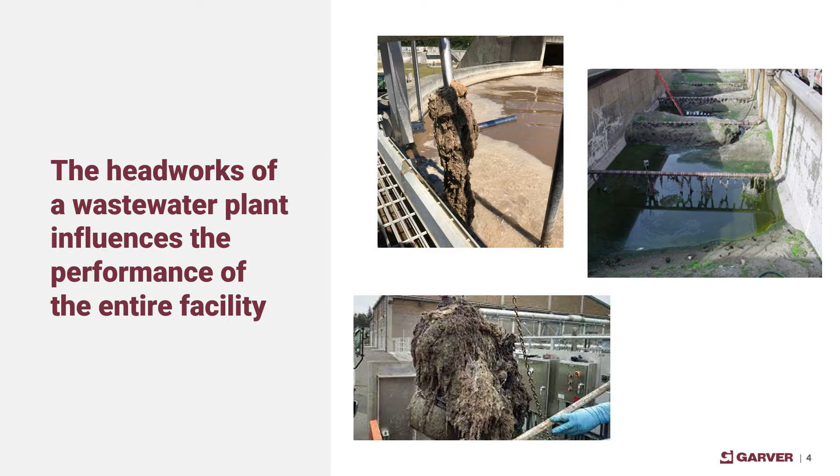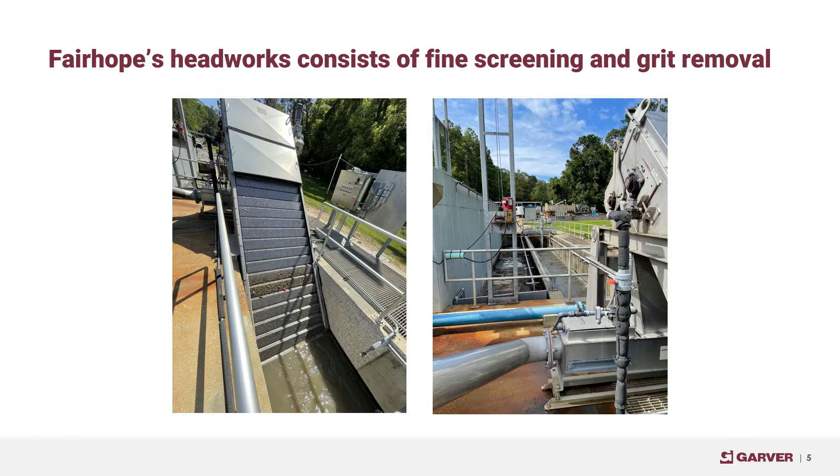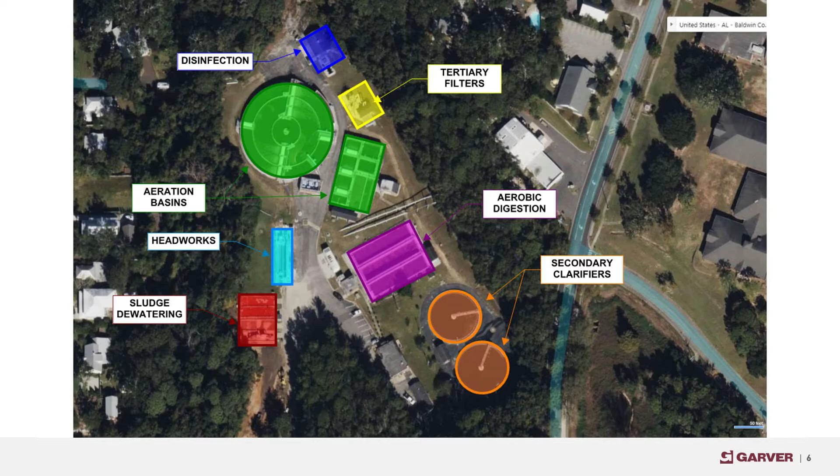So secondly is hydraulics. So what is our flow doing when it comes in the headworks? How are we approaching the screens? Are we getting the necessary velocity? Is it laid out properly? Third is redundancy. What are you going to do if you have a failure? What do you have? Do you have a backup plan?

Fourth is odor. So where are we located? Are we in a downtown corridor like Fairhope? Are we out in the country? There's different considerations that have to be made based on the facility. Fifth is technology. So are we matching the right technology of screening or grit removal with the plant that we're operating?

And then sixth is layout and growth. So are we working within the site plan appropriately to maximize efficiency, and are we taking into account the way in which this plant's going to grow? So those are kind of the six main drivers that we look at. And honestly, some plants may only have one or two things triggered, and other plants may have more. And stakeholders may care more about some of these than others.

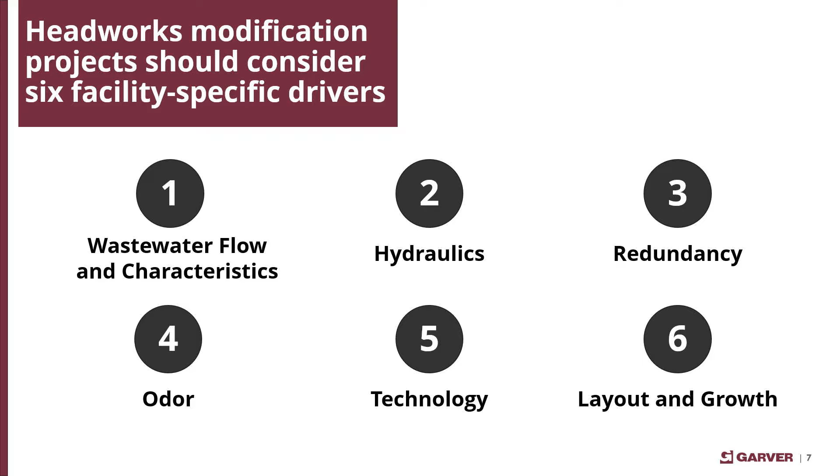We've got residents that live right by the plant here in Fairhope that probably care a lot about number four, about odor. And then we've got operations staff that see the other side of the hydraulics, the redundancy, and the technology. So their drivers are going to be ranked differently than council members or residents. So taking that into account, we've spent a lot of time with staff assembling these Fairhope-specific drivers. We've really tried to take into account all of the feedback we've gotten from not only staff but other engineers in the area.

So the first driver that we've identified is the lack of redundancy at the plant. There's only one mechanical fine screen at our wastewater plant now. And if that screen were to need a part replacement to be rebuilt, which is common, we would have to reroute all of the flow going through the fine screen into the manual bar screen. So that would involve staff having to rake that manual bar screen every two hours or so. So we're having to staff the plant most of the time around the clock.

And there was a specific instance conveyed to us by staff where there was a part during COVID that wasn't able to come in for almost six months, and they were down without the fine screen for six months. So they were having to operate like that, which isn't ideal. It can really take a cut into morale of these operators when they don't have the equipment that they count on working.

One of the main drivers, and maybe this one should have been first, is odor control. So y'all are in a downtown area next to a shopping area, next to residences. You're kind of down in a depression. So odor is going to kind of just permeate the area if not handled properly. So really it can impact people differently, but odor was definitely one that seemed like across the board everybody brought up: how do we address odor? How do we reduce odor in what we consider for the headworks?

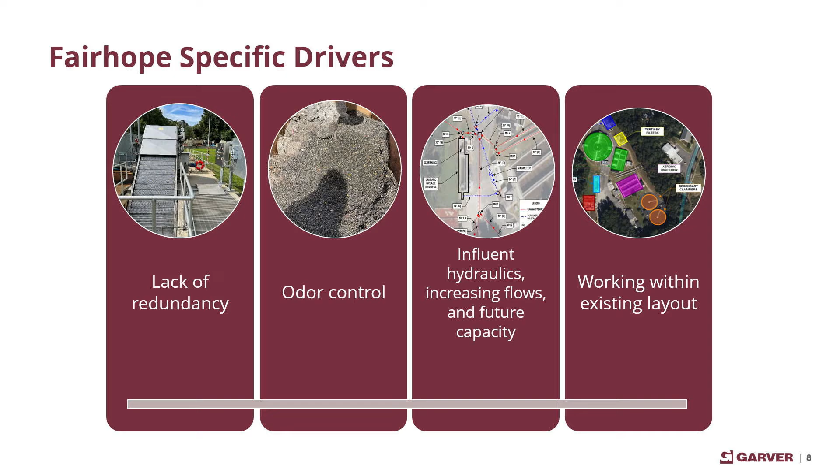One of the things that's unique about this plant is that we really have to be thoughtful about how we look at the layout, where we're putting things on the site, where we're considering putting things on the site. We just need to maximize the efficiency of where we're putting things so that over time we're not creating some sort of issue for them looking back saying, oh, we really shouldn't have put that there. So those are kind of what we've summarized as the Fairhope-specific drivers for this project.

So we looked in the report at various technologies and options to consider. But overall, our recommendation includes constructing a new headworks facility adjacent to the existing one, with 2 fine screening channels, a new grit removal system, a new screenings and grit processing building, and an advanced odor control system. So we'll show you some pictures of that. Wes is going to come and give an overview of that conceptual design recommendation.

All right, good afternoon. Thanks, Lindsay. I always feel like when we do these Headworks talks, there should be a disclaimer at the very beginning because it's not the brightest and shiniest, and usually when you come to visit the plant, this is generally what you try to avoid because it's the one with all the smells. And you know that we're going to have pictures in there that aren't the most attractive, so apologize for not having that disclaimer. But just to pull the highlights out of this conceptual evaluation and show you a little bit of ultimately what those recommendations are.

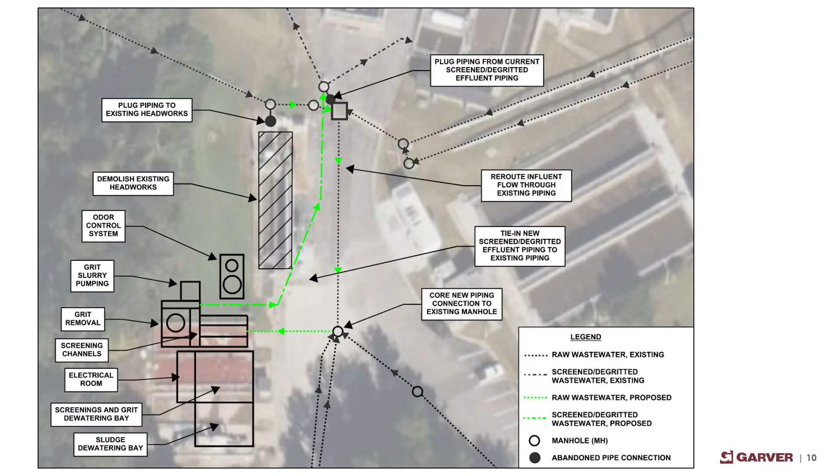So generally speaking, to the southwest of this figure is where all of the improvements would take place. And I don't want to belabor or try to walk through that because it is a busy image. This is just a rendering of those improvements, and we'll walk through that step by step to show you that facility at its conceptual effort. We're super high level in terms of project definition. As we go through detailed design, we'll be able to really dial down and understand what are the facility-specific requirements that make the most sense for Fairhope so that we're matching the needs of the facility with the ultimate things that this project would provide. But it does fit on the site. If we're looking at a high-level view, this would generally be the area that we're talking about.

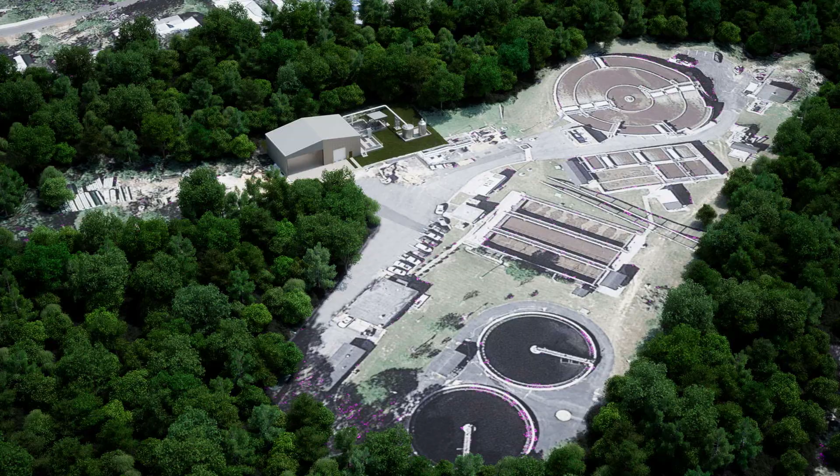Conceptual design recommendations, like Lindsay mentioned, are based on project drivers and facility-specific characteristics. So what this rendering is showing, the very first step that flow would go through is screening channels with fine screens. So Lindsay mentioned redundancy. This would provide staff with the ability to direct flows to another mechanical screen, which is providing more efficient screenings removal, which is ultimately protecting our downstream units. Now, we recognize that Fairhope made an investment with the existing headworks, and that equipment that you have in place could absolutely be relocated and put into these channels. That way it maximizes the investment that you've already made.

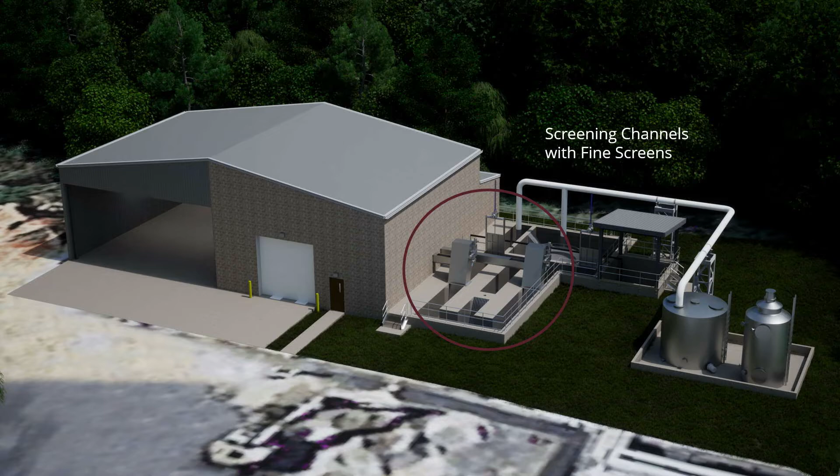The next step that flow goes through is what we call grit removal. What we're trying to remove is the coffee grounds, the eggshells, the small things that will wear and tear on equipment, but are still small enough that they'll pass through fine screening. This step is designed specifically to remove those. Now, one of the key differences with this step in the process compared to what you have now is it's much more confined. There's not a lot of turbulence, so that means we're able to capture that odor. We can put covers over that, and we don't have to worry about moving equipment needing to access that like you have now. So certainly much easier in terms of capturing that foul air.

Now, again, Headworks is not a luxury process. We're not producing that nice, fine, clean, treated water like we like to see off the back end of the plant. We are producing screenings and we're producing grit. And when we're trying to talk about odor, this is where a lot of that odor potential could come from.

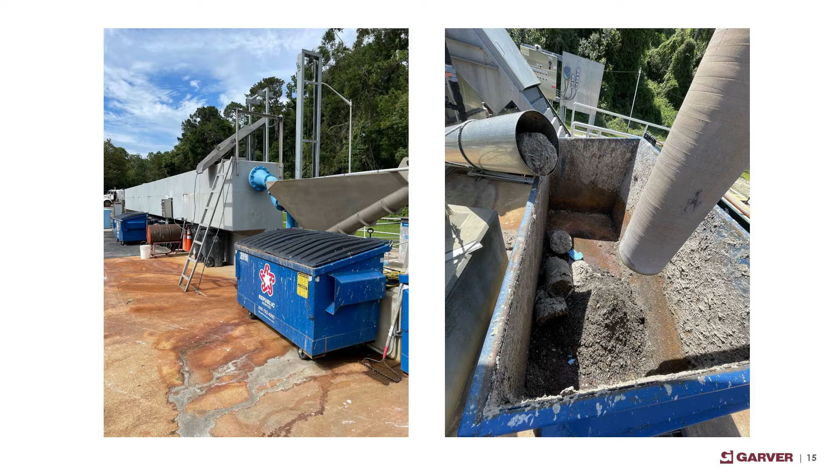So the equipment's one step of it, but we also have to deal with the dumpsters that are going to contain that because, again, they're putting off that foul air that we're concerned about. There's options in terms of how you deal with that. What this facility, in terms of these renderings, show, rather than try to provide bagging systems or other ways to capture that, let's just locate that inside a contained area so we can maximize that foul air containment and pull that out from a specific area so that we're trying to maximize that good neighbor approach

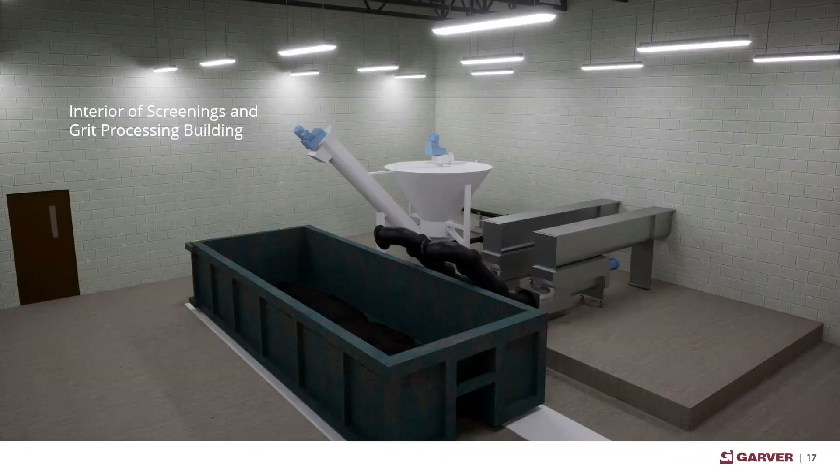that I know Fairhope values. Just a quick look inside that building would show that processing equipment is inside. That's where that dumpster would be located. So in theory, the only time that door would be opened is when the truck comes in to pull that dumpster out, take it to the dump, and bring it back. So again, capturing that air at the source inside.

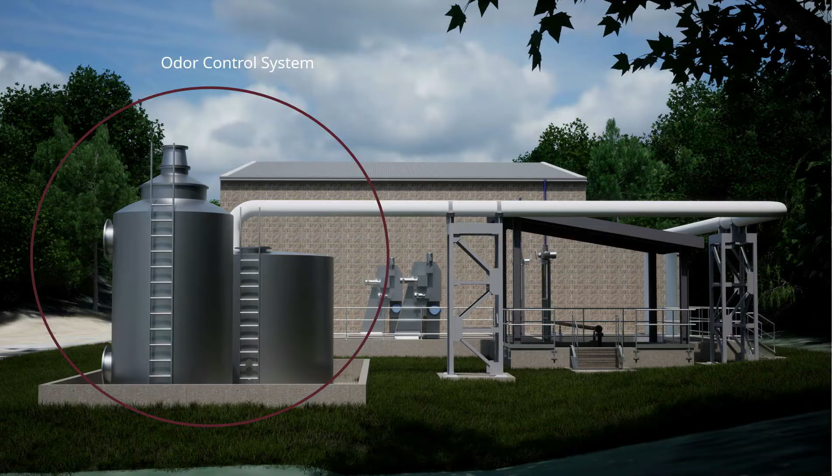The last thing is odor control, unfortunately, is not just covering the channels or putting things inside. That air is hazardous. That air contains constituents that can lead to corrosion. Hydrogen sulfide is a very hazardous workplace environment that we don't want our staff to be around, so we have to pull that air out and we have to pass it through an actual treatment system. This system, and again, this technology would be evaluated further. Generally for headworks, we're looking at biological treatment through a biotrickling filter.

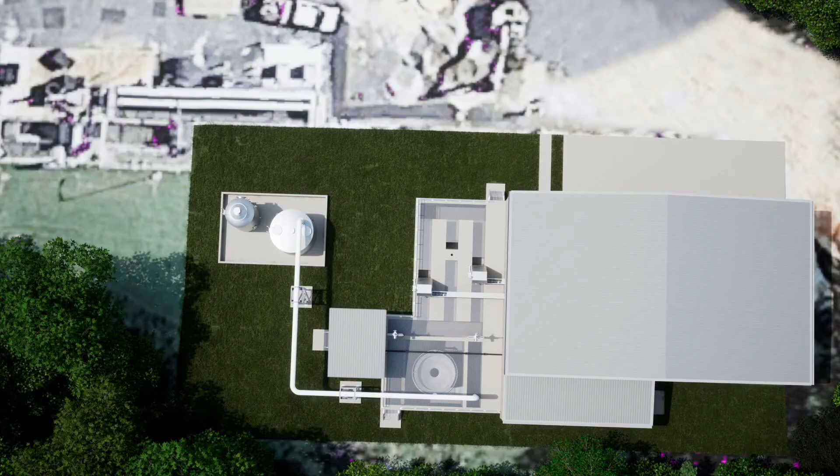And then on the backside, just a way to provide insurance, belt and suspenders, a carbon polishing system so that, again, we're maximizing that treatment and we're producing treated air that doesn't have those odorous compounds that we're trying to prevent or eliminate. Here is an aerial just to show how that fits onto the facility. And again, there's a lot more details that we're not covering but are available in that report, and would be glad to talk through any questions that you might have with that.

Council, any questions? There's a lot of information here. Absolutely. I have one question. Through the two screening process, is the flow going through them simultaneously or one at a time, or one and then another and then alternate? So you can do it a couple of different ways. Some of it is redundancy. Do we want to provide 100% redundancy so that we can go either or? Some approaches to try to minimize equipment size, we can maybe size it to 50-50 maybe for peak flows. Some of that's just an approach depending on staff requirements as well as project budget.

Generally speaking, for facilities this size, I'm of the opinion that it makes more sense to have a fully redundant screen standing by. Usually you don't have issues during the dry weather when things are running smooth. It's during the middle of the night when you get that gully washer and your flows have really ramped up where it's helpful to have that fully redundant screen so you can switch. And for the instance when Dennis and his staff were struggling to get a replacement part in and didn't have 6 months to wait, it's nice to have that if you can accommodate that within the project.

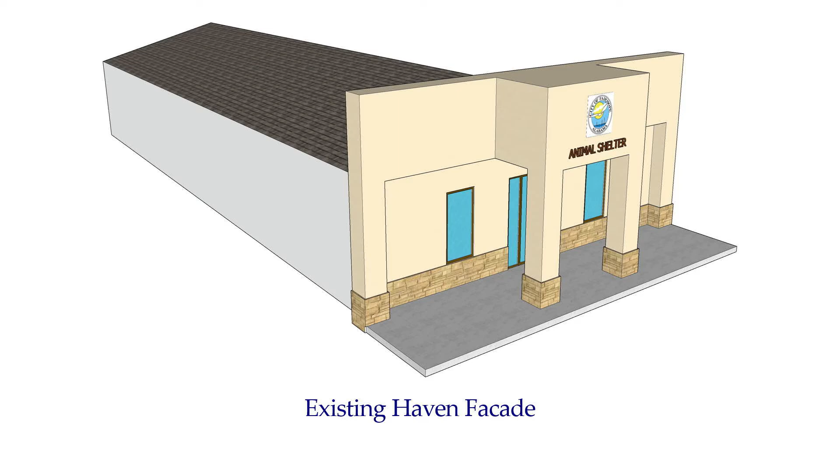It is a very high-use facility. If you've ever been there, it generates a lot of traffic. Unfortunately, we have a lot of animal care needs for animals that are lost and abandoned and need to find homes. It is owned by the city. It is maintained by the city. And in all honesty, the tenants of the Haven did have a home inspector do a pretty thorough inspection, and I don't think there's anything in that inspection that is untrue. The building is showing signs of a high-use building that was probably not built to a commercial standard in its time, and it is definitely long in the tooth and showing its age.

Probably the key problem, the biggest issue, is if you recall in this era of construction the EIFS system came out, and it was just the bee's knees. It was the fake stucco that is basically foam insulation with a stucco coating, and it turned out it's not been a real good product for a building envelope. Because if water gets behind it, it never gets back out, and you end up with rot and things of that nature. Well, imagine this building is very simply a gabled structure approximately 35 by 80 foot deep that has a false front built on it. You can kind of see that; I did a little quick rendering. And all of that false front is an EIFS build-out.

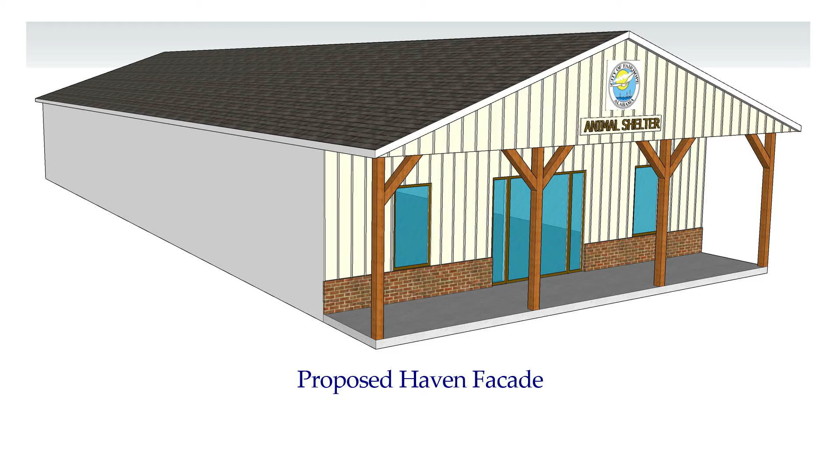This building is built with roof trusses, so there's no interior bearing walls, and the easiest, most straightforward way to make this a great envelope is just to bring that gable roof out, extend it out, create a full width porch, 6 feet deep, because right now it has a small porch that's centered over the door entrance that is almost unusable because it has these exaggerated 4 foot by 4 foot columns that you just about can't walk between to use the side entrances.

And then go back with the exterior wall treatment with like a Hardie board product, which is a cementitious fiber board that won't rot, won't burn, and you can either do it in a vertical board and batten, you can do it in a lap siding, and possibly reintroduce the brick wainscoting at the bottom just to kind of give it a pop of texture and color.

And I'll be honest with you, I stuck the bracing on the columns, thought it would look cute. It kind of looks like a Western saloon, so I think those would probably go out and paint the columns the same color as the rest of the facade and clean it up a little bit more crisp, but I'm not an architect, I'm an engineer.

A for effort, Richard, A for effort. It's so cute, Richard, it is cute.

What we're looking at this first phase, and understand between facility maintenance and our phenomenal electrical team, they've already been over trying to deal with some of the safety issues with some of the electrical. And I will tell you, one of the greatest challenges, they're tapped out, meaning they've used every circuit in their box there, and there's really just no more room for electrical expansion without a redo.